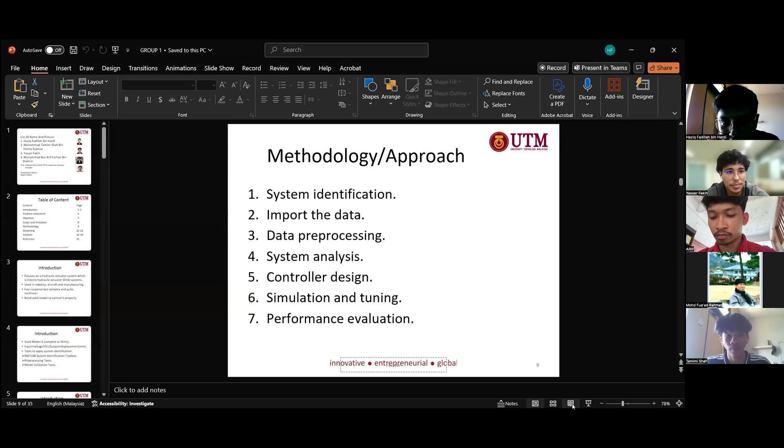Can you see my screen, doctor? Yes. Slideshow, okay. Slideshow, okay.

Next slide. Okay, thank you Haziq. So here is the introduction for our presentation, which focuses on hydraulic actuator systems, specifically electro-hydraulic actuator, EHA systems. These systems are widely used in applications such as robotics, aircraft, and manufacturing due to their fast response capabilities. However, they are inherently complex and exhibit strong nonlinear behavior. Therefore, developing an accurate and solid system model is essential to ensure effective and reliable control.

Next. So for our assignment we use Model A, sampled at 45 milliseconds. Our data has input voltage and output displacement in millimeters. The tools we use to apply system identification are the MATLAB System Identification Toolbox, pre-processing tools, and model validation tools.

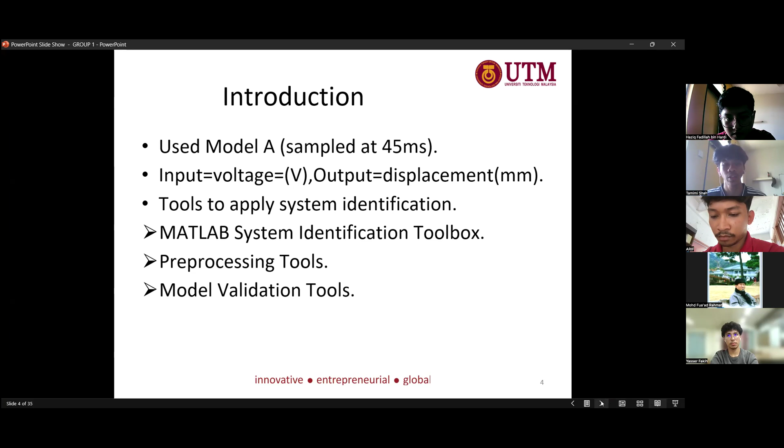Next. So in this case, why we use PID, which stands for proportional integral derivative. This is to make the system performance meet the target, which requires a fast response, lower than 10% overshoot, zero steady state error, and also stability. So we use MATLAB and Simulink for design and testing.

Next. So from our assignment, we have a problem statement that the complex behavior such as friction and nonlinear flow characteristics means the system may have slow response, steady state error, and also instability.

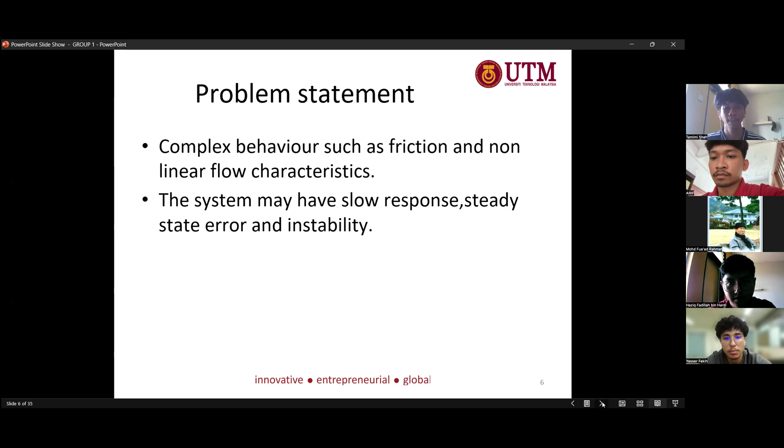So based on our objective for the assignment, we need to model the system under consideration, address steady state error, and also ensure that the system is stable.

Next. So for our scope and limitation, for our model data, we only focus on the Model A data set, and we only use the time domain and frequency domain for our assignment. Then we need to design the P, PD and PID controller to meet the specification. We also need to use the PID tuner for response tuning, and our simulation is limited to MATLAB and Simulink. So I will pass the slide to Haziq.

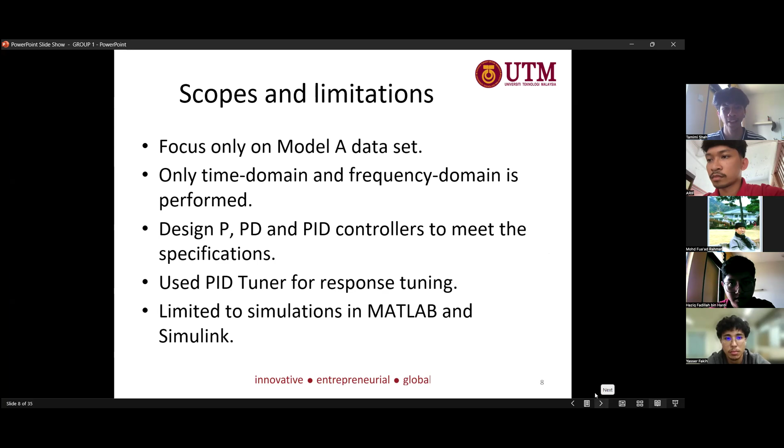For the methodology and approach, first we will do the system identification using the System Identification Toolbox. The second step, we import the data, which is Model A, with a sample time of 45 milliseconds. Then the data preprocessing, where we remove the mean and select the range, splitting it into two, 50% for estimation and 50% for validation.

And the system analysis, we analyze the open loop behavior, such as the pole-zero map and step response. Then from the open loop, we construct the closed loop system using unity feedback. We analyze the transient response, peak time, settling time, and overshoot.

Then after the system analysis, we do the controller design. We design the P controller, PD controller, and PID controller. Then we use root locus for pole placement and tune the gain manually and with Simulink.

For the sixth step, simulation and tuning: we develop the system in Simulink, apply the PID tuner to refine the gain value, and verify the response through step input testing. The last step is performance evaluation, where we compare the uncompensated and compensated systems to see how effective the control is in meeting the design specifications.

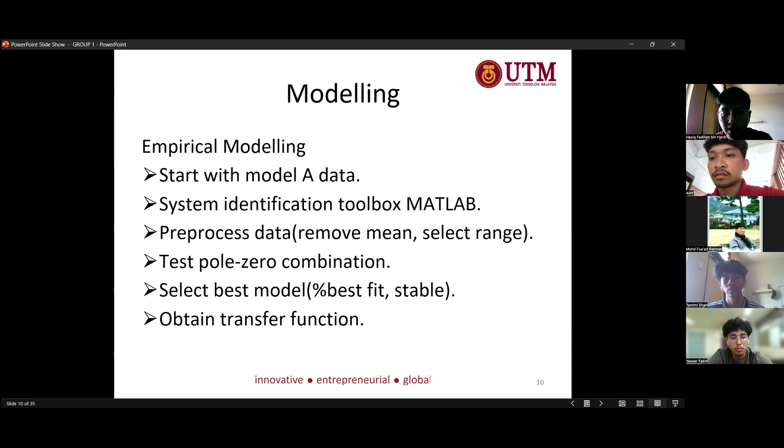For the open loop system, the continuous time transfer function is: negative 1.155 s squared plus 333.6s minus 1.052, divided by s cubed plus 56.21 s squared plus 0.005923 s plus 0.3329.

For the closed loop, we use the formula Ts equal to Gs over 1 plus Gs, which will be equal to negative 1.155 s squared plus 333.6s minus 1.052, divided by s cubed plus 55.05 s squared plus 333.6 s minus 0.7191.

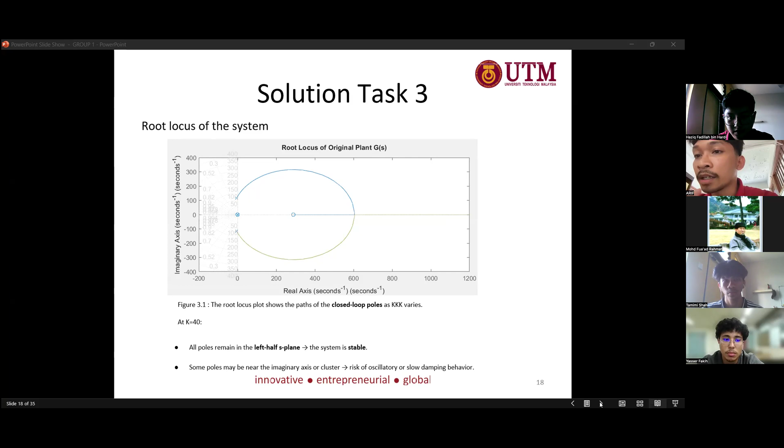Ideally, we want a gain margin above 6 dB and a phase margin above 45 degrees for good robustness. This tells us that the system is quite sensitive to additional gain or phase lag, and could become unstable.

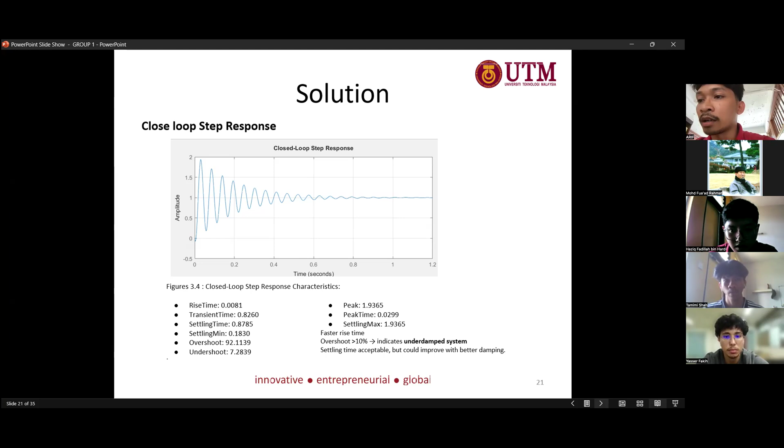The high value of KP will reduce the rise time, but it also increases the overshoot and reduces the steady state error. But the high value of KD will also reduce the overshoot and improve damping and increase stability.

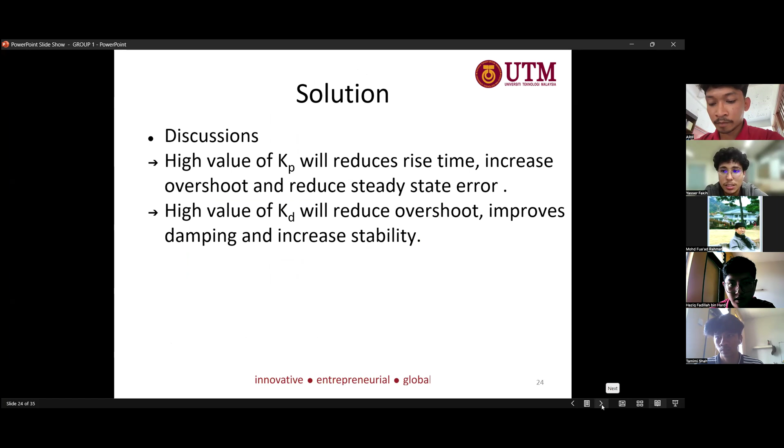This is the Simulink for the PD controller.

Yes, this is the graph. As you can see, the time for it to be stable is quicker than before, and the overshoot is a bit less than before.

So the step response that we just showed, it will show the overshoot and settling time decrease, and the system demonstrates a step response behavior equivalent to the MATLAB programming. Simulink works as an alternative way to the programming in MATLAB.

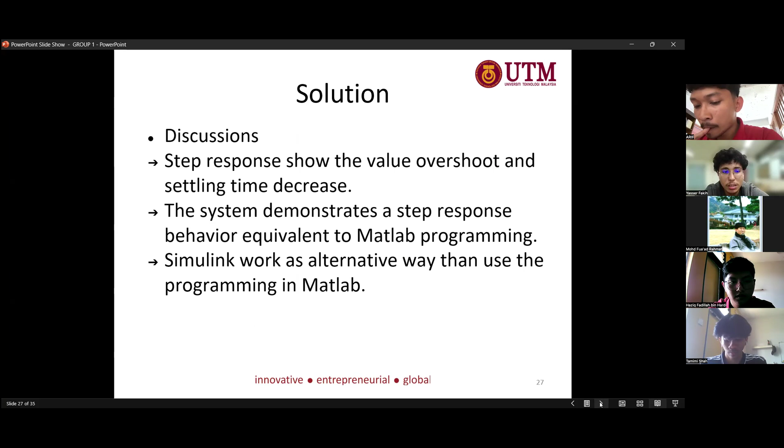And that's all. I'll pass it to Tamimi.

Based on the PD, we can use the PID controller to improve our steady state error. So here is our Simulink diagram for the PID controller, using the value from the PD, which is KP equal to 15, and also KD is 0.1570.

So here we get the same result as the PD controller since we use the same values for the PD design.

So to achieve a better output or better result in our graph, we need to tune the KP, KI, and KD. So we will use the tuner in MATLAB to tune the output.

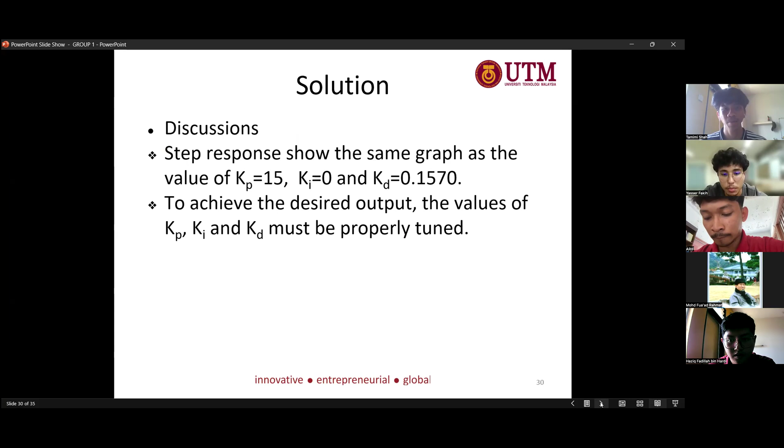This is the MATLAB coding that we use to tune the PID controller, but this is just the assumption value for the KP, KI, and also the KD.

So when we use the MATLAB coding, we need to manually insert the value to find the desired output. Instead of that, maybe we can use the tuner in Simulink, where the PID effectiveness can be better.

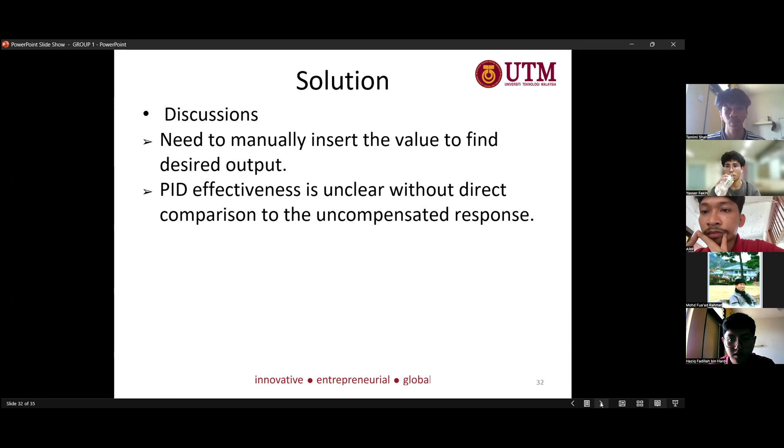So let's see the comparison between the uncompensated response and the compensated response.

So here we use the PID tuner in MATLAB, and we can see in the graph that the overshoot becomes lower, which is 7.66%, and also the response becomes stable and we achieve steady state error of 0.

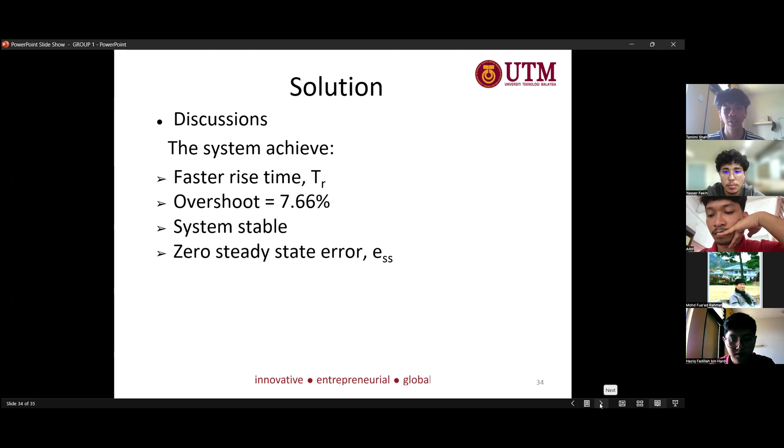Based on our solution from the PID tuner, we already achieved a faster rise time, and also the overshoot became lower than 10%, which is 7.66%, and the system is stable with zero steady state error. So we can conclude that our system already achieved all the objectives that we wanted in the assignment. That's all from our group.

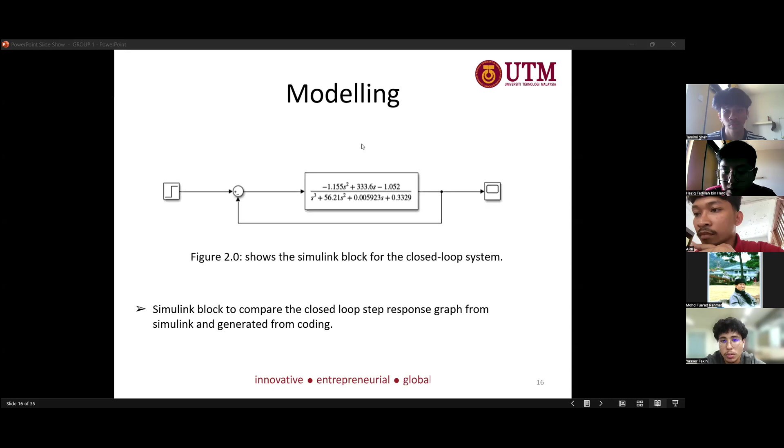How many poles? How many zeros? 3 poles and 2 zeros. 3 poles and 2 zeros. What is the best fit? Best fit is 97.92%.

97.92%. Tamimi, can you show the poles and zero location? I need to show screen, Doctor. Okay, that's the pole and zero, poles and zero map.

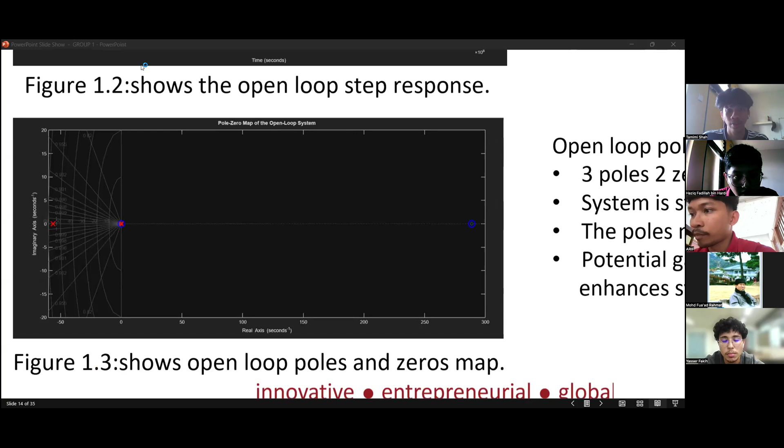Can I see the... who is this? Yasir, Yasser Fakih.

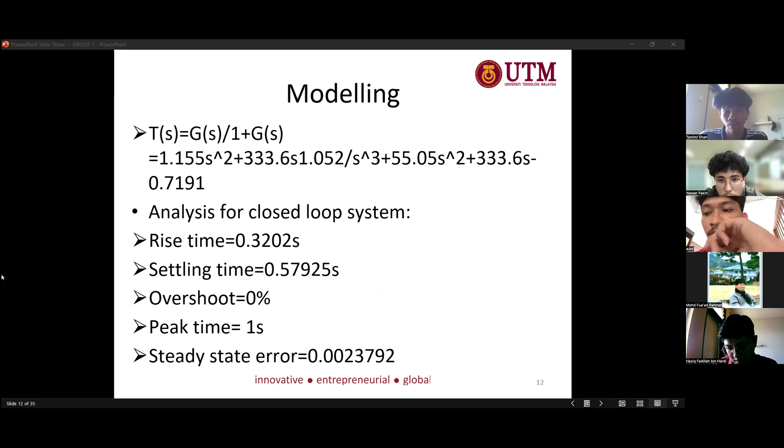Yeah, what do you need, Doctor? Which slide, number 12. Rise time 0.32 seconds.

0.32 and the settling time 0.57925 seconds. So after controller design, what is the rise time and steady state error? After controller design, yes.

After controller design, what is the settling time and steady state error? The settling time is 0.06, and after the PID controller, it's zero. The steady state error is zero.

Who is the other guy? Arif, doctor. Yang Arif, the professor wants to ask.

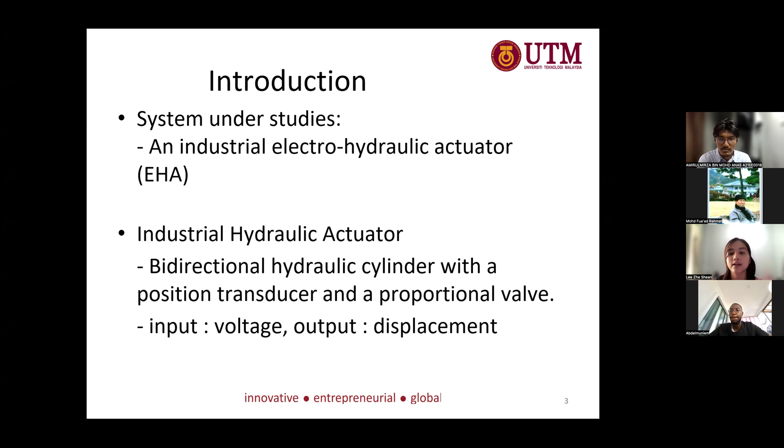The system under study is an industrial electro-hydraulic actuator commonly used in aerospace, robotics, and manufacturing, known as EHA. It's a bidirectional hydraulic cylinder with a position transducer and a proportional valve. In our model, the input will be the voltage and output will be the displacement that the hydraulic actuator can achieve.

In our assignment, we will be doing system identification - developing a mathematical model from experimental input and output data given by SIR, written as model A. Next, the system is represented using a continuous time transfer function model developed from system identification. The model will be estimated by fitting to real data, and we analyze accuracy in terms of best fit percentage, poles and zeros, and frequency response, which will later be presented by Munim in task 1.

Next is the system identification procedures. We import the data into MATLAB, remove the mean, and select the data range. Then we split the data into estimation and validation sets, and choose models, number of poles and zeros. Lastly, we estimate the transfer function model, which will be further explained by William. The tool we use for system identification is the MATLAB System Identification Toolbox.

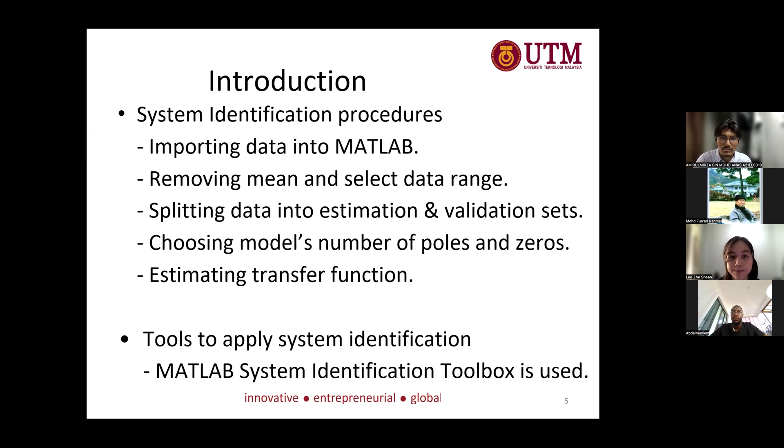After that, we move on to tuning the PID controller. Before that, I'll introduce the PD controller, which is used to improve transient response while maintaining steady state error. The PID controller is PI plus PD together, implemented to improve steady state error and transient response independently. More details on designing this will be explained in task 4 and task 5. For tuning, we'll use the PID Tuner in Simulink, which is used for automatic tuning of the PID gain.

For our assignment, Model A's problem statement is that the hydraulic actuator system is difficult to control due to nonlinear behavior. A mathematical and legitimate transfer function model is needed to understand and control the system accurately. Since manual modeling is very hard, we need the help of MATLAB's system identification tool using real data.

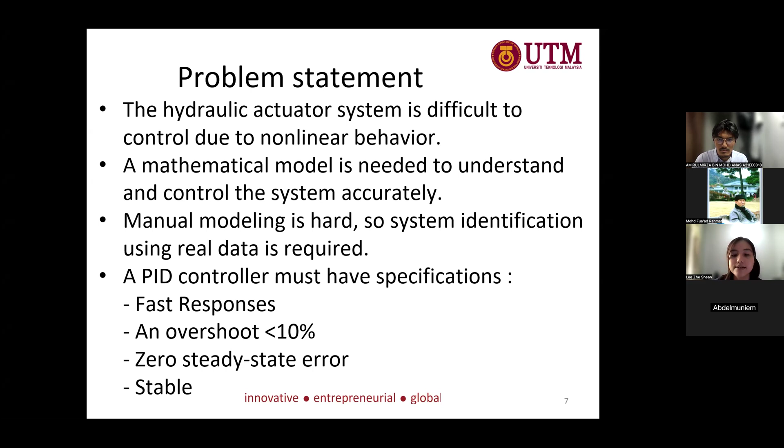The PID controller in our assignment has certain specifications to meet: fast response, overshoot of less than 10%, zero steady state error, and a stable system. For the next objectives, I'll pass the floor to Syed.

I'll continue with the presentation first. The next part is the objectives of our assignment, which is to model the system under consideration.

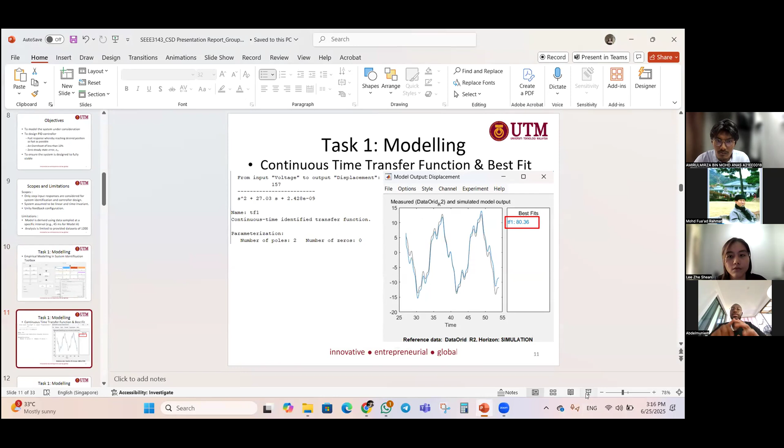So if we choose the first one, we are going to save more cost. Also, after getting the right estimation value, we proceed to get the time response and frequency response, to see the transient response, the overshoot, and the pole and zero locations, as you can see in the slides.

Can you change the slides? Yes, pole and zero map for the open loop system. And that's for the modeling part.

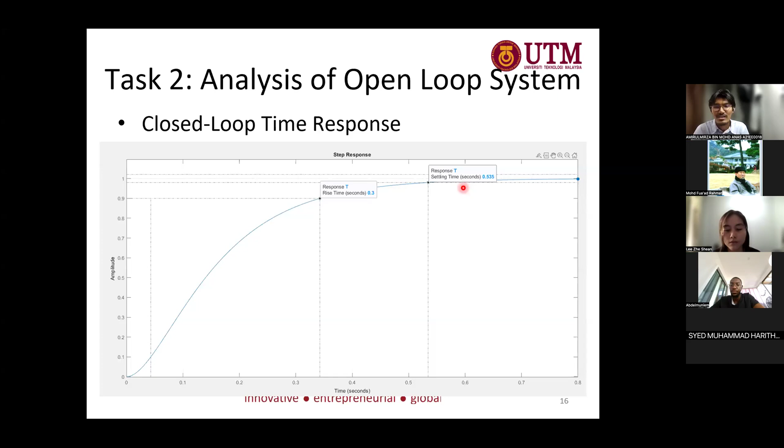And the settling time is just 0.535 second, which is just over half a second from the rise time, meaning the system is stabilized very quickly.

And it is shown here that the overshoot is 0%, which is most impressive. But I can say that this is the solid baseline that we can use to design and tune the PID controller.

And then wait, yeah, I think next slide.

Just to add on here, we get zero steady state error because we are using a step input for a type 1 system. Our two poles and zero zeros system is a type 1 system, so that's why our steady state error is 0.

Yes. And then this is the Simulink model.

The same model that we used, with the dynamic characteristics of the hydraulic actuator system.

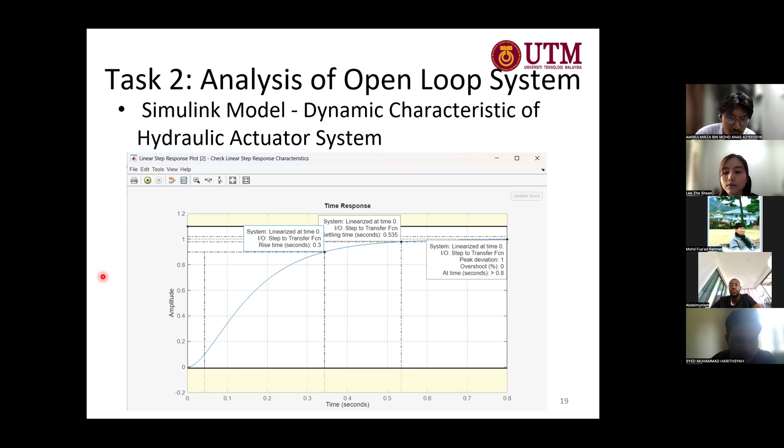So yes, this is actually the baseline for our next task, which is the closed loop system analysis for tuning the PID controller.

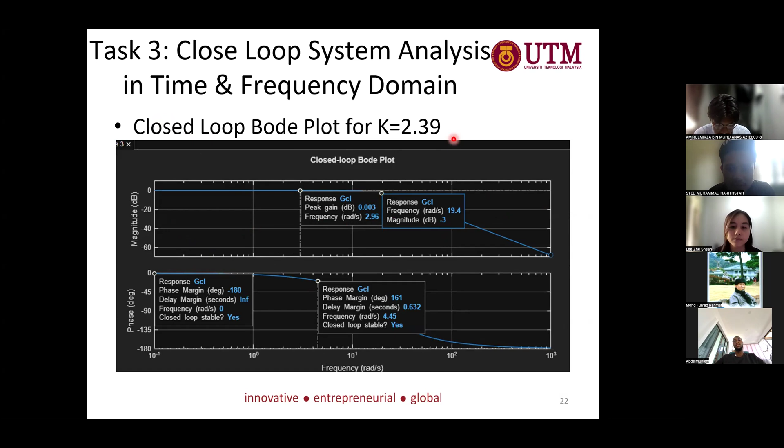So the next slide is for a closed loop bode plot. We are using gain equal to k equal to 2.39. For the closed loop bode plot, our phase margin is 161, and then our magnitude peak for k equal to 2.39 is 0 dB.

So to find log, magnitude peak is 0 dB, 20 log, so magnitude peak is equal to 1. We observe at the plot and get the peak frequency 2.96 radian per second. To know the bandwidth frequency, we tap at negative 3 dB and find out the bandwidth frequency is equal to 19.4 radian per second. So the system is unconditionally stable.

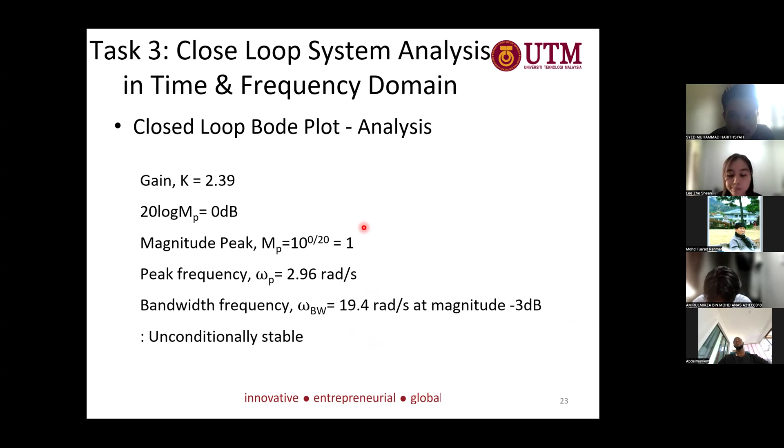So next I will pass to Lee.

So this is a manual calculation I proposed to find our PD controller design, using the formula to prove that the steady state error is equal to 0, which I mentioned just now. And then the new TS we aim to have is 0.134.

So using the formula, I can obtain the real part of our closed loop, our new closed loop pole for the angle criteria. So the real part is here, and the imaginary part is also found using the real part equals to zeta omega n. By using mathematics, shifting left and shifting right, plus minus and square root, I got the final value J 14.46. So the final value for our closed loop pole for the next step is negative 29.85 plus J 14.46.

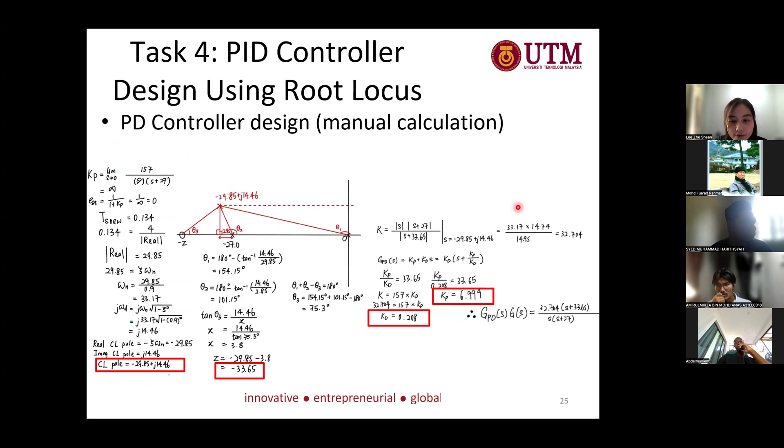And from task 2 and task 3, since we knew that we have zero steady state error, we don't need any PI controller.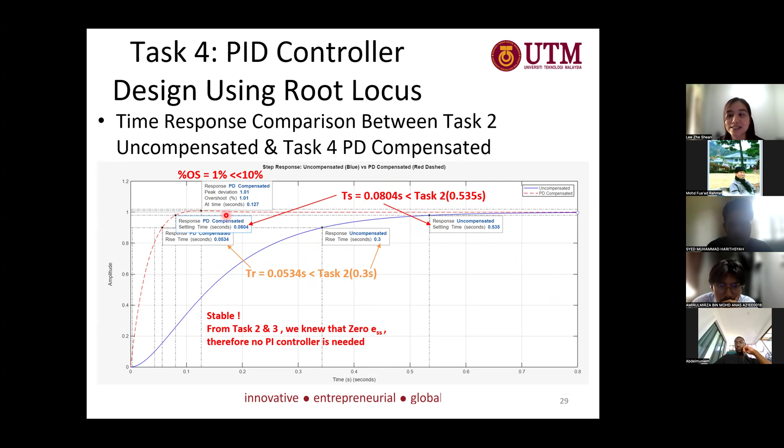This one is a time response comparison between task 2 uncompensated and task 4 compensated. For settling time, we managed to reduce the settling time, meaning it becomes faster. And also rise time becomes faster as well. Just that the overshoot rises a little bit, but it is still considered a good design because it's within 10% of the requirement.

Moving on to task 5, which is about tuning of PID gains. We are required to tune the PID using Simulink as well, but this time we use the auto tune, not manual calculation by ourselves.

So this is the tuning PID controller that we believe is good for our design. We go to see the performance and robustness first. As you can see, the rise time here is 0.0416 seconds, and the settling time is 0.0661 second, which is even better. Also the overshoot is clearly 0.6%, which is slightly lesser than 1%. So it's even better than task 4.

To achieve this performance and robustness, the controller parameters suggested by the PID tuner in Simulink are as such: P is 9.0744, and I we don't care because we don't need any PI controller. The D value is 0.29524, and N is 5501.671. So this is a proof that we're actually tuning here.

This is a reference track, and this one with the solid line is our tuned response. So by extracting the values that I gained just now, I put them inside the PD controller here as labeled, and also checked again the linear step response characteristic.

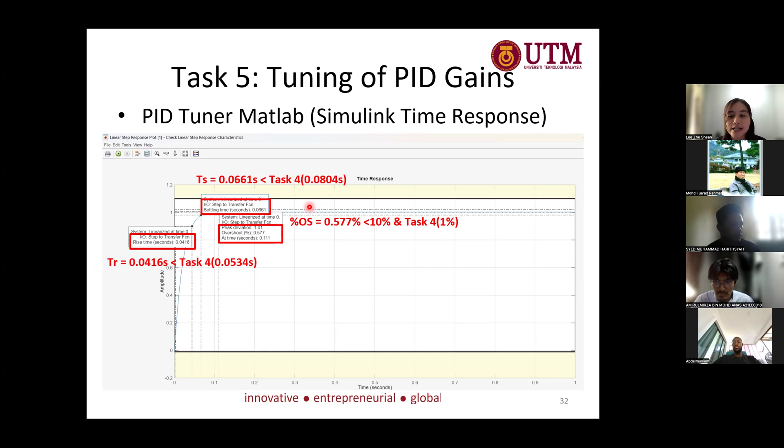What is the mathematical model for this case? The mathematical model is this one: 157 over s squared plus 27.03s plus this one, because it's relatively very small, so in further analysis, all of us assume it to be 0.

What is the best fit? The best fit result is 80.36%. So we have fulfilled the best fit requirement because the requirement is 80%.

What is the value of the steady state error and settling time before controller design? The settling time is 0.5345 and the steady state error is 0.

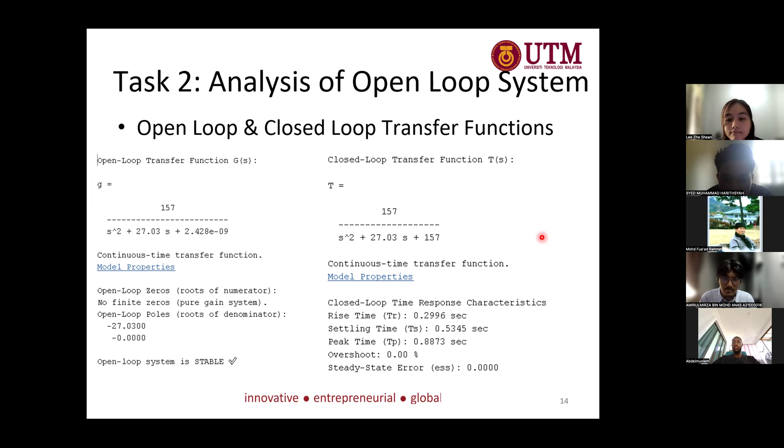What is the value of the settling time after controller design? After, the settling time is 0.0804 second.

Yes? Show me some code in the slides. MATLAB codes, okay. Oh, just now? Sorry sir, which code? The one just now. Oh, oh, this one - can you make it bigger? Okay, wait. Is it big enough?

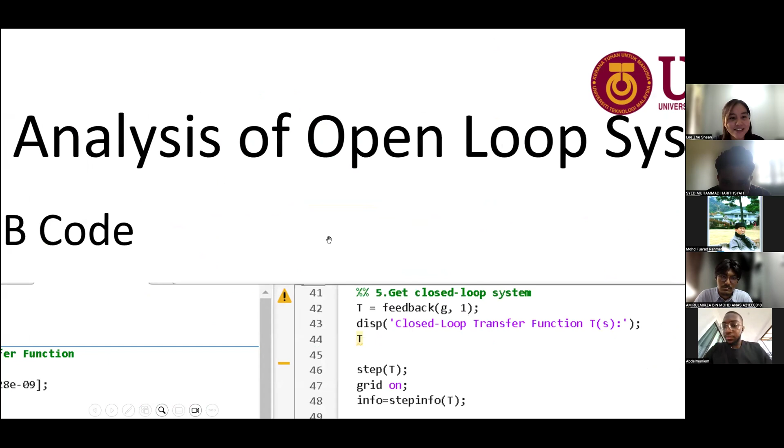Okay, Munim, what is line 15? Line 15, you want the PZ map? What is the function of PZ map? The function is to get the poles and zeros map. Let's plan it. Can I see on the right, please?

Munim, what is feedback bracket G, comma 1? What does 1 stand for? Line number 42. It should be bigger, this number. Feedback bracket G, 1 bracket. What is the 1 stand for? One should stand for...

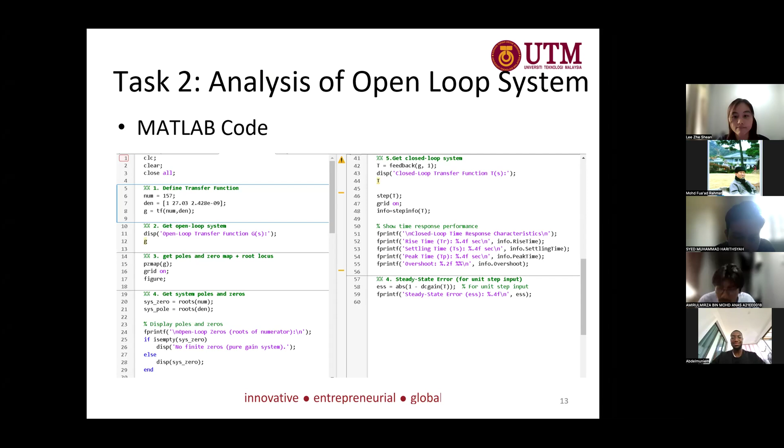Next code. Next MATLAB code, is it? Okay, this one, bigger. Can see, browse. Browse, browse further down, browse down further.

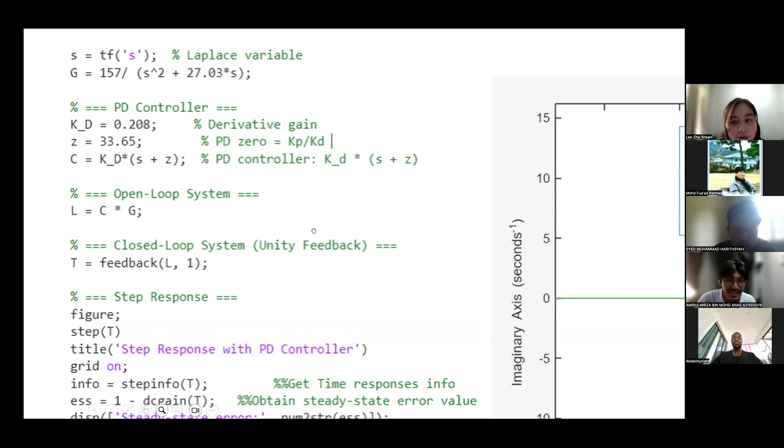Why is this one ESS? There is no absolute. ESS equals 1 minus DC gain. Why is it not absolute? The previous one was absolute, but this one has no absolute. Because actually from task two I put absolute, but then in task four I found out, because I got the result from task two, that it's zero.

So I just don't care if I put absolute or not, because whether you use absolute on zero or no absolute on zero, it will also get zero. But this one is for our case, because our case is steady state error equals to zero. For other cases that might be different, so that's why for my case I didn't put absolute in task four.

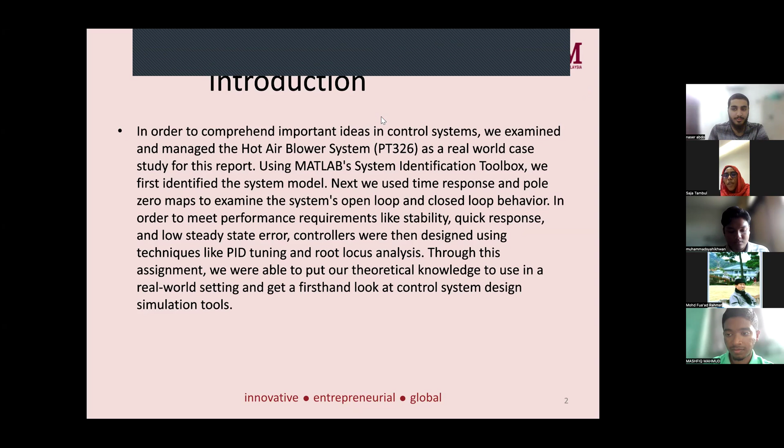Our project is about the hot air blower system, PT326. So first, I'm going to start with the introduction about the system.

The system is a laboratory scale thermal process control system used to study the dynamics of heating and temperature. It consists of a heater and a fan that push heated air through a channel where the temperature is measured by a sensor. This system is known for its time delay, thermal lag, and slow response. We have to find a solution for this problem.

We use a control system design. In our project, we use MATLAB and Simulink to analyze and control this system.

The main steps include collecting temperature data and analyzing it, developing a mathematical model using system identification, analyzing open loop behavior, and designing PD and PID controllers to improve system performance.

The MATLAB tools used are the identification toolbox, control system toolbox, Simulink, and the PID and PD tuner. Our goal is to design a controller that ensures the system is stable with a fast response in the closed loop system.

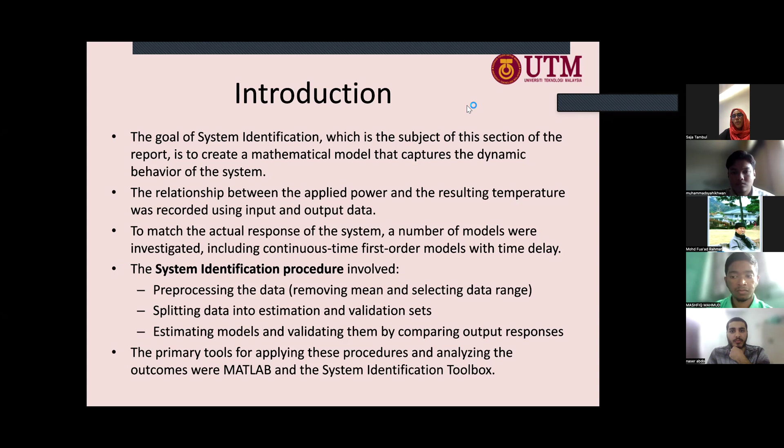I'm going to start with task 1, what we are doing in it. First, we collect input and output data from the system. The input was the electrical power and the output is the temperature.

We use MATLAB to import the data from a file called drive2. Then we remove the mean to center the signal. Then we select the range, from 0 to 0.08 seconds.

After selecting the range, we have about 1,000 data points. We divided it into two parts: 50% for estimation, from 0 to 500, and the other 50% for validation.

The estimation data was used to build the model, and the other 50% was used for validation, to test the performance. Now I will let my friend Mashfiq Mahmud continue with task 2.

Okay, Assalamu alaikum. Next slide, please. So I'm going to present task 2, which is more focused on stability and performance analysis of our system.

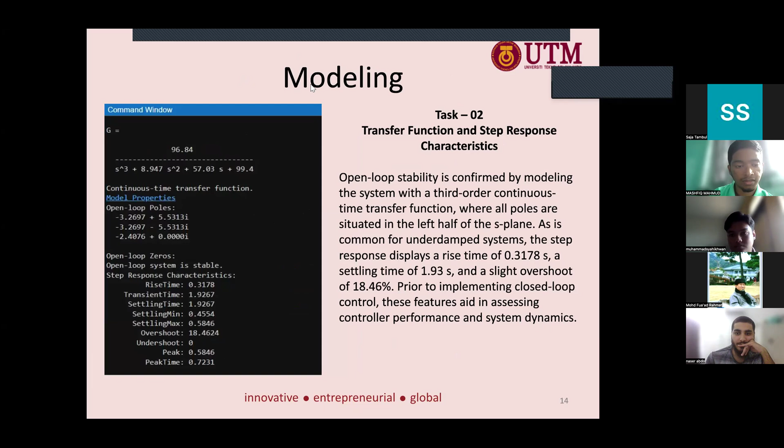My friend Mohammed will start. Okay, thank you. My name is Muhammad Syaikun Razali, and I will tell you about task 3, which is stability analysis, root locus, and Bode plot. The first one is the root locus.

And the phase margin is 57.65 degrees at 4.76 radians per second. Next, we go to the next slide.

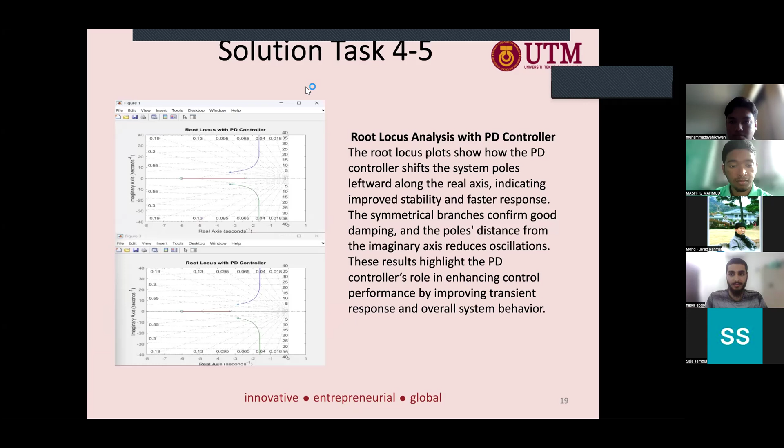So I pass to Naser for task 4. Okay, Assalamu alaikum. Now I'm going to explain task 4.

For task 4, as you can see in this photo, the branches of the root locus have shifted to the left along the negative real axis. This left shift is key to improvement because it moves the dominant poles further into the left half of the S-plane. In control systems, when poles move to the negative side, the system becomes faster and more stable.

Another important point is the distance between the poles and the imaginary axis. With the PD controller, the poles are further away from the imaginary axis, which translates to a higher damping ratio, meaning the system oscillations are smoother and the transient response is more controlled.

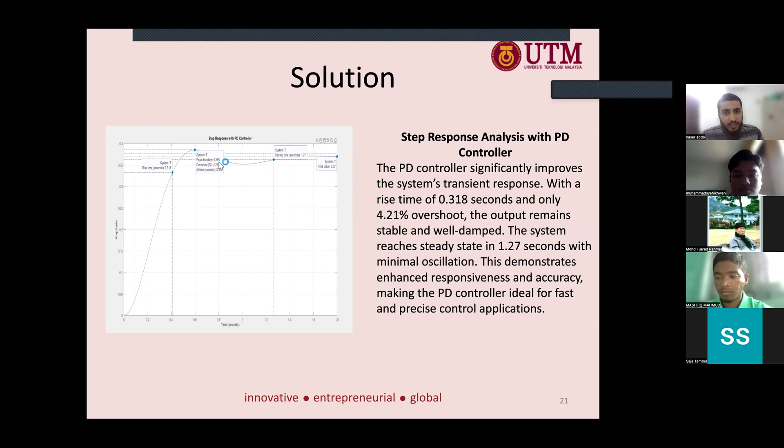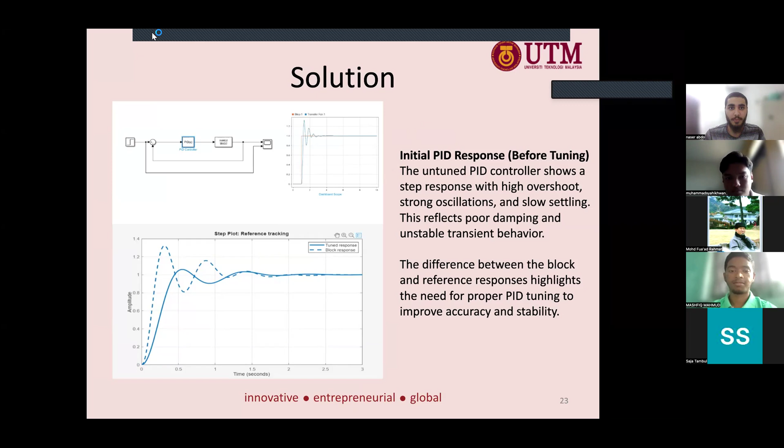Okay, so we go to task 5, where we use the Simulink model developed in task 4. We click the PID block and then tune the PID, changing the slider value under response time and transient behavior. Looking at the step plot before tuning, the PID controller shows a step response with high overshoot and slow settling, reflecting poor damping and unstable transient behavior.

So we have to change the behavior and response time to tune and improve the accuracy and stability.

By changing the slider value under response time and transient behavior, we can look at the parameters and compare the tuned one and the block one. The block one is the old response, and the tuned one is the new response.

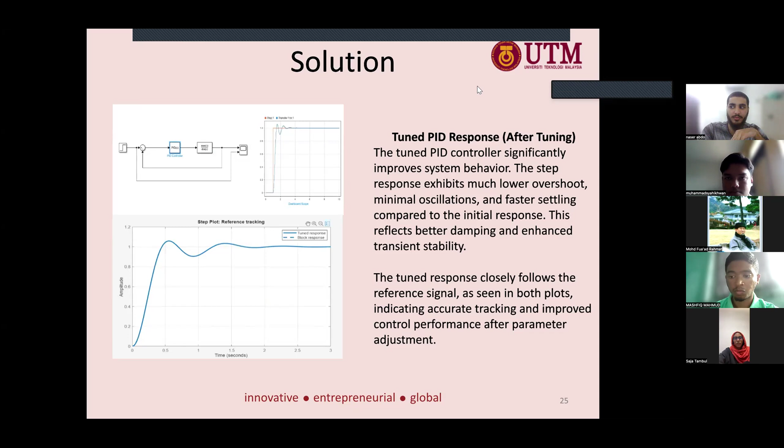I pass to Saja to make a conclusion. In conclusion, we know that the PID tuning efficiently reduces the overshoot and improves the accuracy of the system, making it more stable. That's all for our group. Thank you.

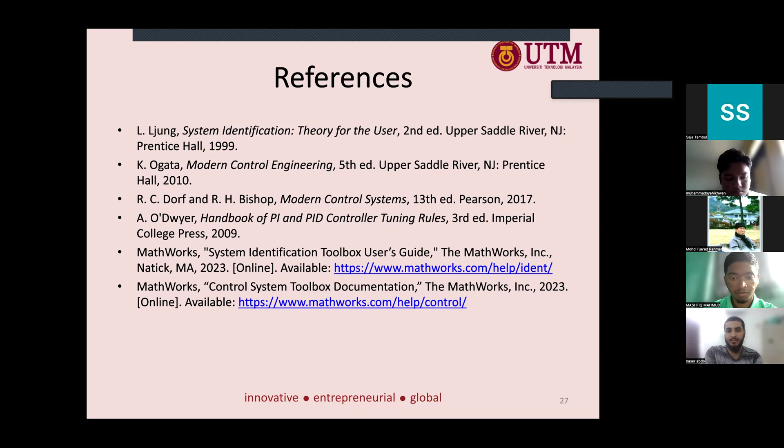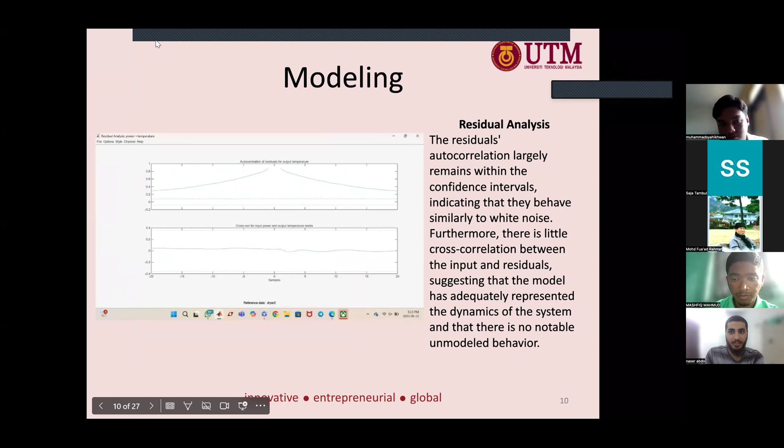Go to task 1, task 1. Show the transfer function, the model. This slide? No, the number of poles and zeros. This one? The next one, you can zoom. Where is the model? The zeros in the midline and the 3 poles on the left.

The mathematical model, the transfer function - we didn't upload it in the report. Go to task 2, Nasser. In my one, I have it in MATLAB. Next slide.

Yeah, this one? Here. Before the previous one, yes. G equals 96.84 over S cubed plus 8.947 S squared plus 57.03 S plus 99.04. 3 poles, no zeros. What is the best fit? 88.17. Stable, eh?

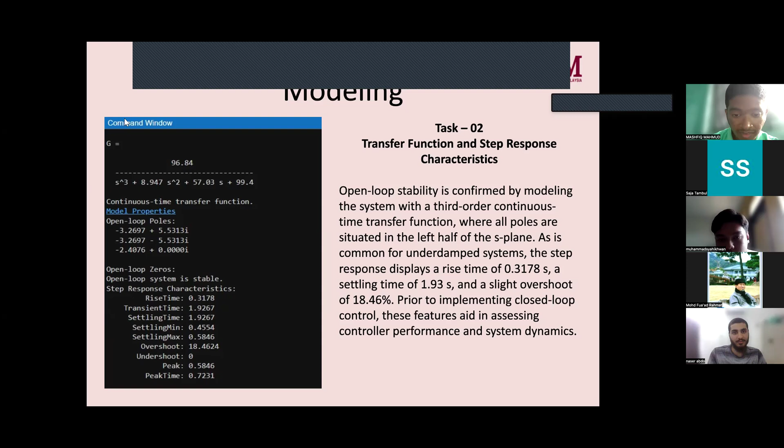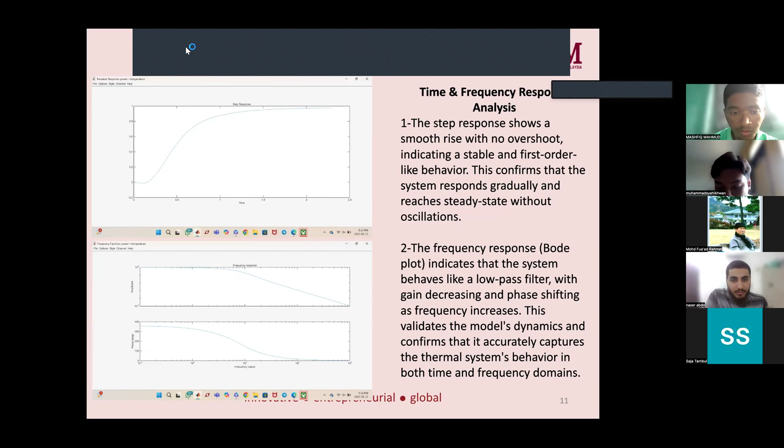Mashfiq, what is the settling time and steady state error before controller design? Go to the previous slide. It was 1.93 seconds settling time. Steady state error - Mashfiq, steady state error? Previous slide, Nasser. Everybody should have one copy. Okay, doctor.

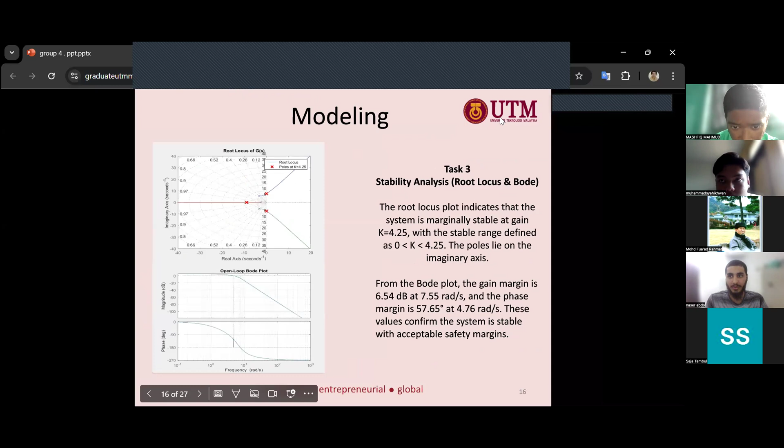Zero or does it have a value? It has a value, doctor, it has a value. Because after the PID controller it becomes 0, but before there was a value. Share the codes, can you share the codes? Any codes? Okay, stop. Bigger. Okay, 1 minute doctor, good. Okay, Kabir, Nasir.

Why is there a black square on my screen? Delete that. Delete the black square. This one? Yeah, okay, bigger. Bigger, bigger. Oops, slowly, wait.

Syah Ikhwan, yes. Line 24... line 14. Sorry, line 14. Line 14. 40, 14, 1-4. What is PZ map G?

Pole zero mapping, pole zero mapping. That thing. Plotting the poles and zeros. Location of poles and zeros on the S-plane.

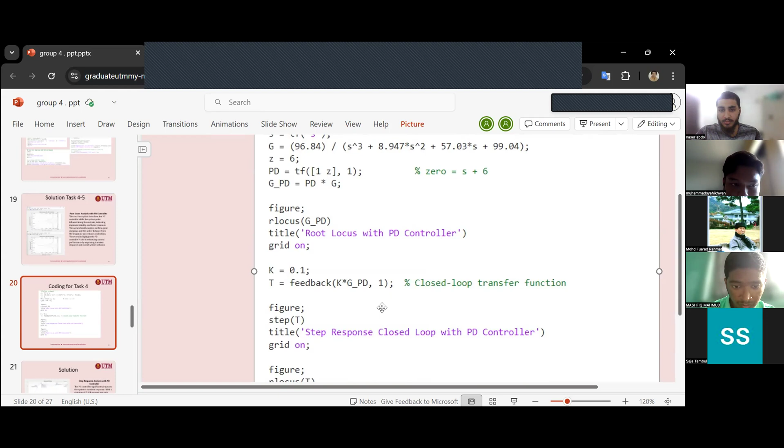Ikhwan? Ikhwan, yes. Unity feedback. Unity feedback. Scroll down, scroll down. Next code, next code, next code.

This one, bigger. Bigger. Scroll up. Wait, scroll down. Scroll down. Scroll down, okay wait. It's loading. No, bigger, okay.

Mashfiq, margin. Yes sir. Margin bracket K,G stands for what? K is the gain and G is the transfer function, like the gain of the transfer system. The gain of the system. Yeah.

Saja, margin bracket K,G stands for what? Margin, we need to get like the K is... we need to get our gain. Naser Abdo, margin bracket K,G stands for what?

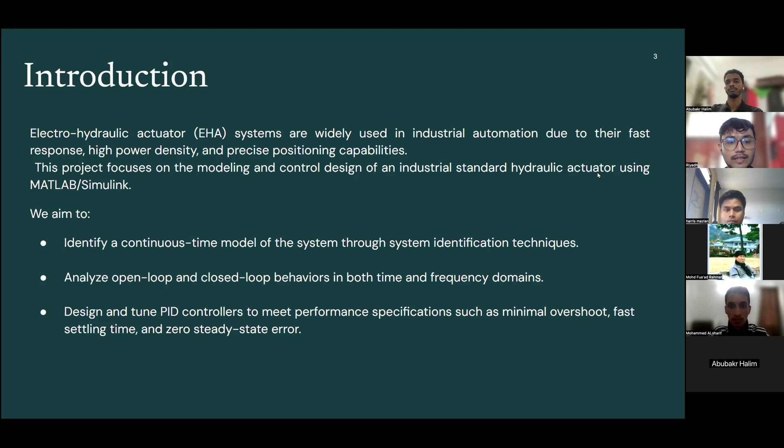We will be using system identification to build mathematical models of dynamic systems using measured data, developing models to represent the relationship between input and output of the hydraulic actuator system. System identification procedures include data processing, model estimation, validation, and analysis of system response. The tools used involve the MATLAB system identification toolbox, enabling estimation of transfer functions and evaluation of model performance through graphical and numerical methods.

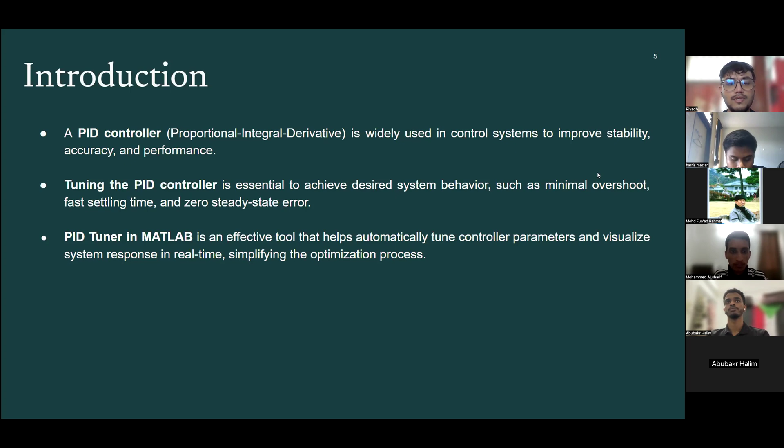We will be using a PID controller, which is widely used for control systems to improve stability, accuracy, and performance, where we'll be tuning the PID controller to achieve desired system behavior. The PID tuner from MATLAB is an effective tool to help automatically tune control parameters and visualize system response in real time, simplifying the optimization process.

Our problem statement is that electrohydraulic actuator systems are known for their high power density and precise motion control, but their performance is often challenged by nonlinear characteristics, parametric uncertainties, and system disturbances. For accurate modeling and effective control strategies, it's essential to ensure stability and meet performance requirements such as minimal overshoot, fast response, and zero steady state error.

Our project aims to identify the dynamic model of the hydraulic actuator system using the MATLAB system identification toolbox and design an optimized PID controller to enhance the system's time and frequency response.

Our objective is to model an industrial hydraulic actuator system using the system identification toolbox in MATLAB, to analyze the dynamic behavior of open loop and closed loop systems in both time and frequency domains, and to design and implement PID controllers to improve system performance, including response time, stability, and accuracy.

We will tune the PID gains using the Simulink PID tuner and compare controller performance with classic tuning methods, and validate and interpret system performance based on simulation results and control design criteria.

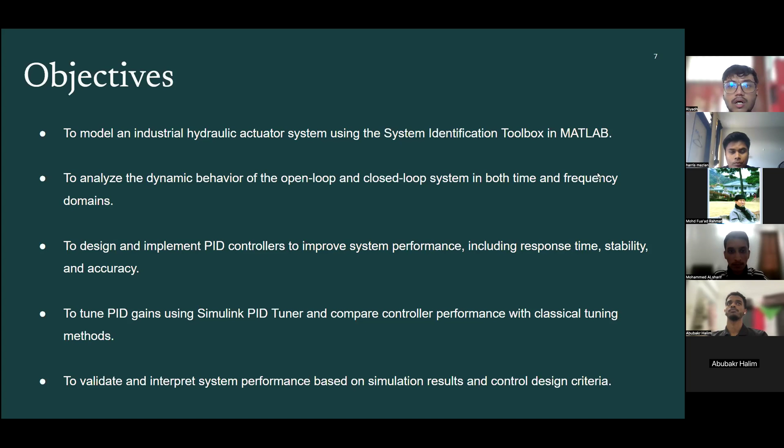This project focuses on modeling and controlling an electrohydraulic actuator system, which is commonly used for precise motion control. We use the MATLAB system identification toolbox to create a mathematical model from experimental data. After that, we analyze the system's performance using MATLAB and Simulink in both time and frequency domains.

Finally, we design PD and PID controllers to meet performance targets like low overshoot and fast settling time. We also use Simulink's PID tuner to automatically adjust the controller for better performance.

Next, limitations. Of course, there are some limitations. First, everything is done using simulation. No real hardware is tested.

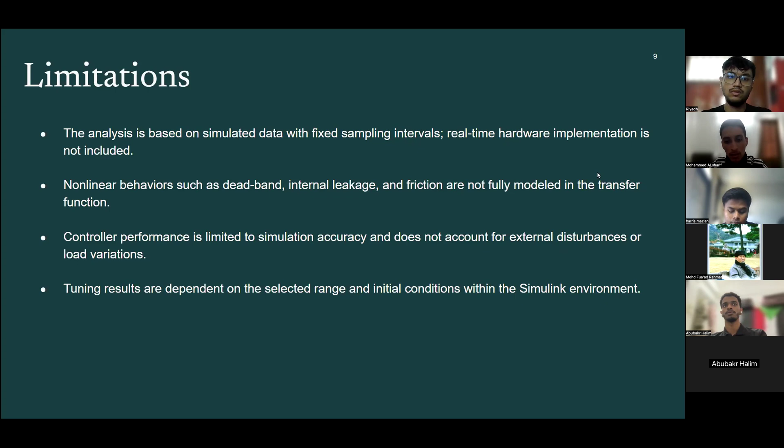Second, the model doesn't include all nonlinear effects like friction or leakage. Third, control performance depends on simulation accuracy and doesn't account for real-world disturbances. Finally, the tuning depends on the selected simulation settings and conditions.

Methodology: the project followed 5 main steps. First, we defined the system using MATLAB and estimated a transfer function. Second, we analyzed the open loop system, looking at things like pole-zero maps and step response. Third, we modeled a closed loop system and studied how gain affects stability.

Fourth, we designed a PD control using the root locus method. Lastly, we fine-tuned the PID control in Simulink to get the best response. All steps will be explained in the next slides.

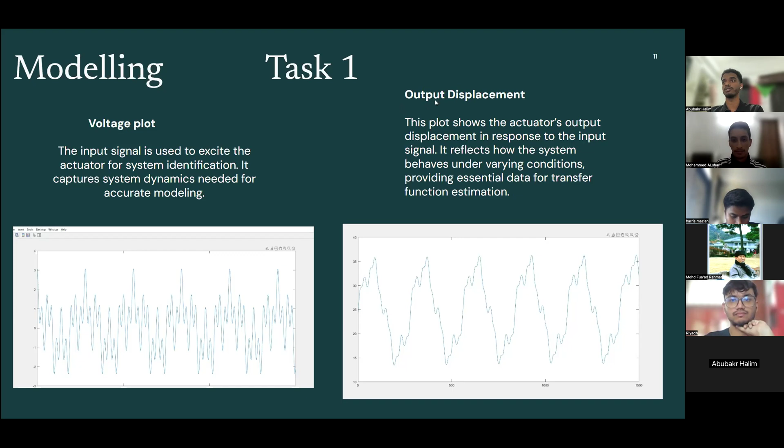So for the first task, we started by plotting the voltage and displacement, which is our input and output for the system. The input signal is used to turn on the actuator, and the output is in millimeters, as shown in the figure. This is the graph of input versus output signal, before we do any pre-processing, before we even get into the system identification tool, which we get to on this slide.

Then we start by importing the data, which is the two files that we have for displacement, which is the output, and the input is the voltage.

After the pre-process, we divided the system into two. We have 1.5K samples, so we did the first 750 samples, from 1 to 750, and then from 751 to 1.5K. We drag and drop the first data into the working data, and the other one into the validation data.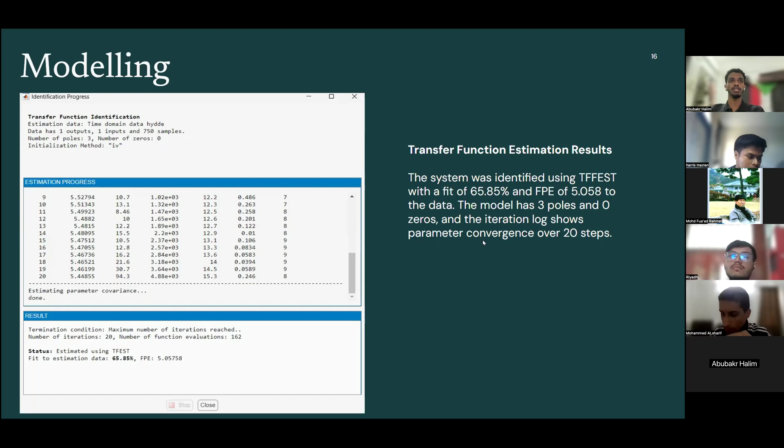So we got a best fit of 65.85% and a final prediction error of 5.05. In this case, our model has 3 poles and no zeros. As we can see, it's considered a low match, not that good, not similar to the actual measured data.

So we tried again using 3 poles and 1 zero. We tried increasing the zeros because increasing a zero on the system improves the transient response. As we added one more zero, we got 98% fit to the estimation data, and the final prediction error went from 5 to 0.015, which is quite low, a very good fit. This improvement suggested that the number of poles and zeros is suitable and accurate for capturing the dynamics of the system.

So this is the graph, and now it's almost identical, on top of each other, because of the good percentage. That's it, and then we got the transfer function: 110.7s plus 2.94, divided by s cubed, 30.5 s squared, 0.688 s plus 0.126. That's all for task one.

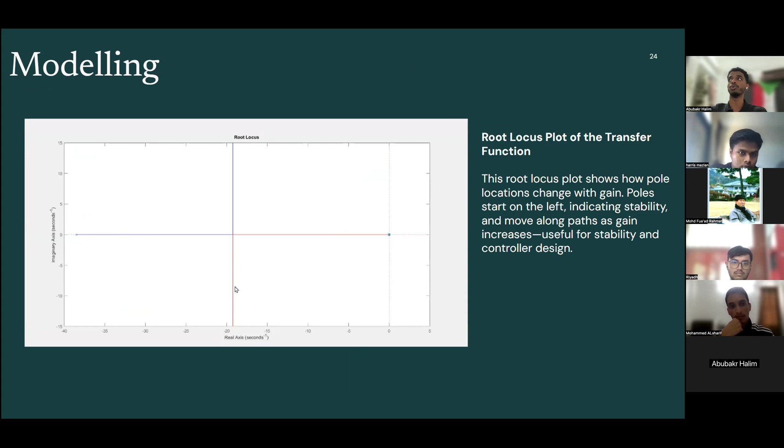Then I defined zeta, did the 45-degree damping, which gave us zeta equal to 0.707, shown in this graph. This is done by the line S grid, zeta, and 0, which gives a line from 0 with the zeta angle. From this, we obtain the gain equal to 6.6, the dominant pole at negative 19.2, damping of 0.707, and overshoot of 4.3%.

So we will go to the mapping. We map the poles and zeros. The previous part was using the command window. Now here I'm writing actually a MATLAB file.

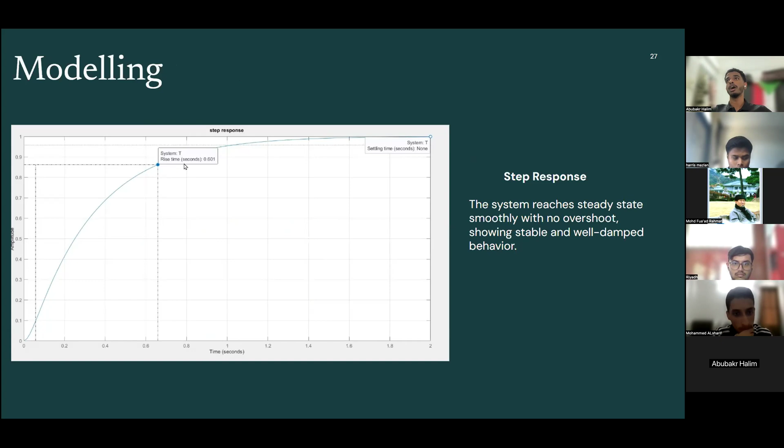Keep in mind these values, because now after the gain K, this step response shows a faster rise time and a small overshoot, indicating improved response after multiplying by the gain K and doing the feedback. The rise time was 0.6, now it's 0.07, which is way better. The overshoot is 5%, which is also considerably low.

The settling time initially was not available, and now it's like 0.2, which is quite fast. So these are the specifications after gain K: very fast rise time, transient time, everything is quite fast compared to the first one. The overshoot of 5% is the only thing that didn't improve, which I think is quite normal after multiplying by the gain K. Initially it was 4.4 and now it's 5.03, which is quite normal. The ESS was 0.03, now it's 0.006, which is way lower.

And yeah, that's it for the first three tasks. Now I will pass the mic to Harris, who will explain the next two.

Now we move on to task 4, which focuses on designing PD and PID controllers using the root locus method. This is the root locus that we generated. We got a gain of 4.2 and also a complex pole at negative 11.1 plus 12.5j, so the damping ratio is 0.66 and an overshoot of 6.16. The goal here is to ensure our hydraulic actuator system responds quickly with less than 10% overshoot, maintains stability, and achieves near zero steady state error.

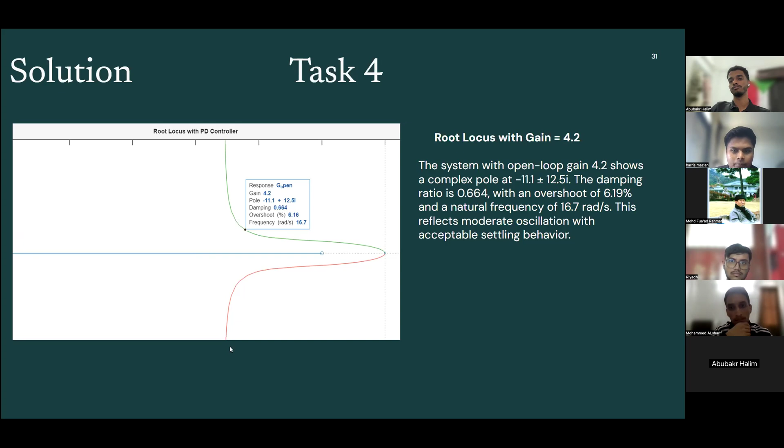This is the coding we used to generate the root locus. The first one is the transfer function, and we use a zero location at 5, which we want to make the root locus shift more towards the left to ensure stability and also a faster response. Then we multiply the PD with our transfer function. That's how we got our root locus.

This is the final step response with the PD controller. We selected a gain value of K 4.2 and also the zero at 11. This helps push the pole further left, improving speed and response. The final closed loop system showed a faster rise time and reduced steady state error. This step response confirmed better dynamic behavior with only about 1.52% overshoot and fast settling.

This is the coding that we used to generate the previous slide. This is the PID controller that I generated using Simulink software. We chose KP value of 18, KI equals 6, and KD equals 3. This block diagram is the transfer function, but you cannot see the value because the number is too big.

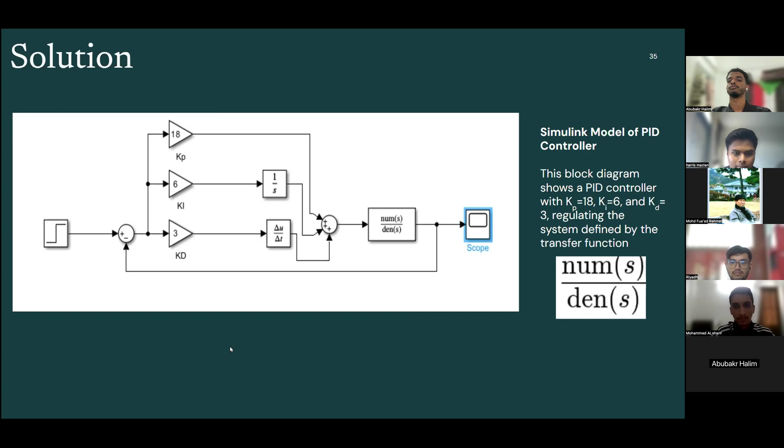This is the step response of the PID control system. The step response shows a fast rise with a slight overshoot and also a smooth settling, indicating effective regulation by the PID controller.

So this is the open loop and closed loop hydraulic cylinder control system. The open loop diagram shows a system without feedback where the desired displacement is directly used to drive the cylinder. The closed loop diagram adds feedback to the input to correct errors and also improve accuracy and stability.

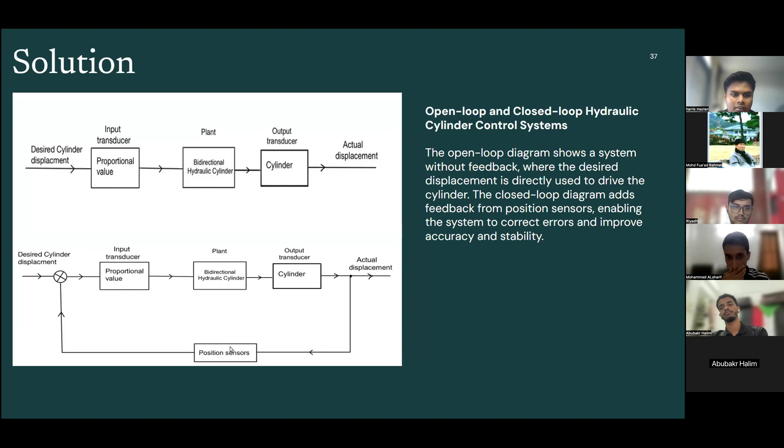For task 5, we focus on automatically tuning the PID controller using Simulink's PID tuner. We use the Simulink model from task 4 and access the PID block to open the tuning interface. By adjusting the sliders for response time and transient behavior, we generated the optimized PID gains. You can see this in the next slide.

So yes, this is the interface. We use the response time and also the transient behavior to make sure our spec is achieved. As you can see, the block response is the old one, and the tune is the one we use to tune our graph.

So we managed to get the overshoot percent. We managed to reduce the overshoot percent by 19.93%, which I think meets the requirement. So yeah, I think that is all for me.

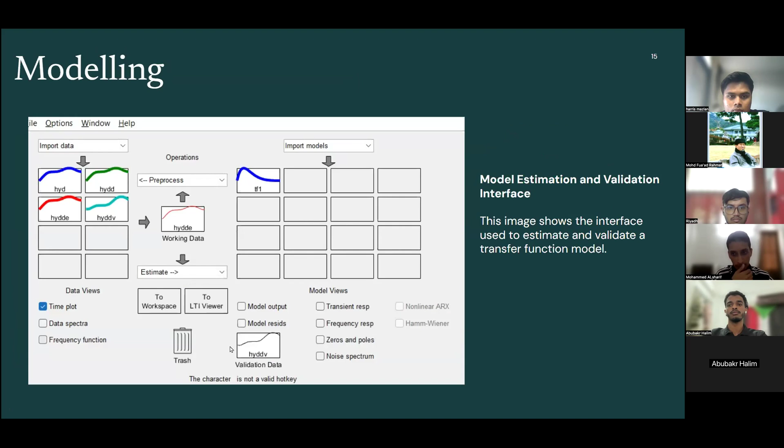Best fit? How much best fit? 98.09. 98. Okay, good, very good. Your presentation is very good, no problem.

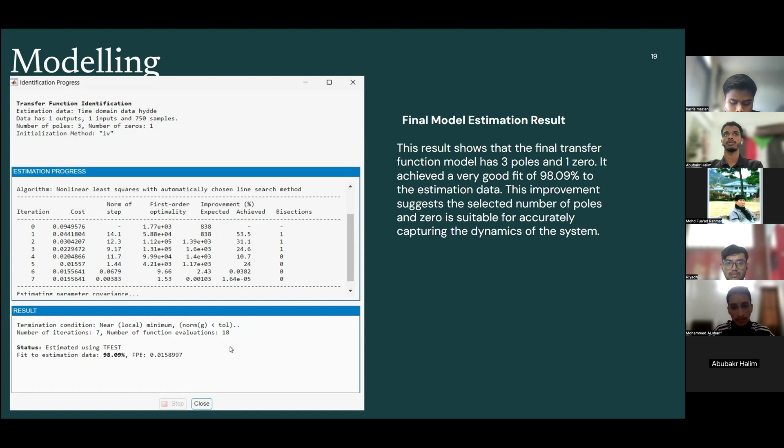Can I see the code, please? Which part of the code? Any code will do. Any? Okay, no, not this one. No, this is outcome. Okay.

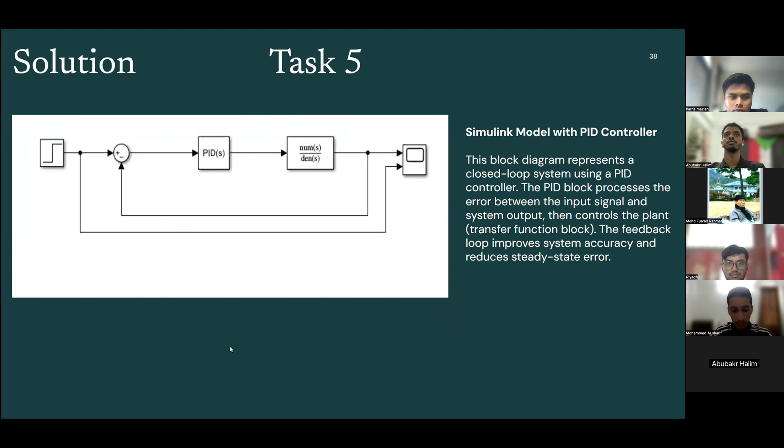This there, okay, next code. Root locus, okay right, next code. Next code. No, that's it, very good. Okay, very good, complete.

So you, Harris, the objective to reduce steady state error and to reduce settling time, achieved? Yes, Doctor, achieved.

What do you learn from this assignment? I think this assignment is like a process. For example, task 2 is without the PD and PID controller. The settling time, the ESS, and also the rise time are not so good without PD or PID controller. So to make sure the settling time and ESS is improved, we use PID controller so that we can get an overshoot and ESS to be reduced.

Abubakr Halim, from the assignment, what do you get on the positive side? What do you learn? I learned how to use the software, like the system identification tool and all this MATLAB. Never tried before? No, the system ID tool and the PID tuner I never tried before. Okay good, is it a new experience to you? Yes, the PID I've done some project with the PID before, but it was not like this.